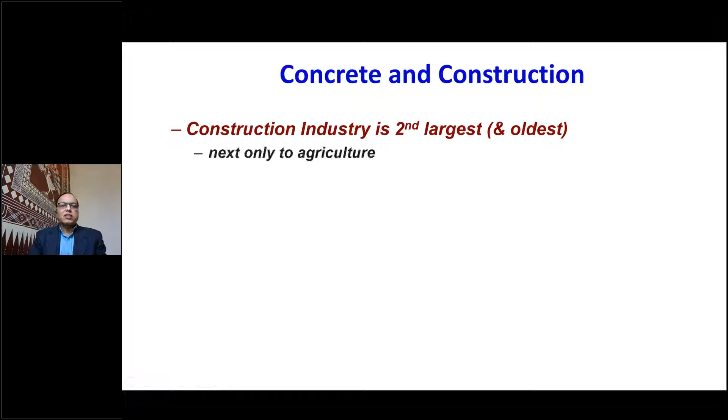Now, straight away going to the topic of today's discussion, special concretes for special structures. We all know what concrete is and how it is useful in day-to-day construction. The construction industry is the second largest, and it is the oldest industry next only to agriculture. Concrete or cement is the second largest material used in our country; number one, as all of you know, is water. Currently, the use of cement is about 250 kgs per head per year. That is the cement consumption. 250 multiplied by the population of our country will give you the total cement consumed in our country.

Currently, India has a potential or capacity of producing about 500 million tons of cement, but we are currently producing about 360 or 370 million tons to cater to the current requirement. Coming to concrete, it is a continuously evolving material. It is not the same old 1:2:4 concrete that we used to talk about. There are many varieties of concrete which have come into being. At least at the last count, I do not know the number now, but when we last listed, it was 65 plus special concretes that were actually being used.

All of you know that concrete is the most used material, and sometimes it is misused, and sometimes it is abused. When it is abused, you see that the structures fail, and that is the time, very unfortunately, when engineers are in the news and TV channels when some structure collapses.

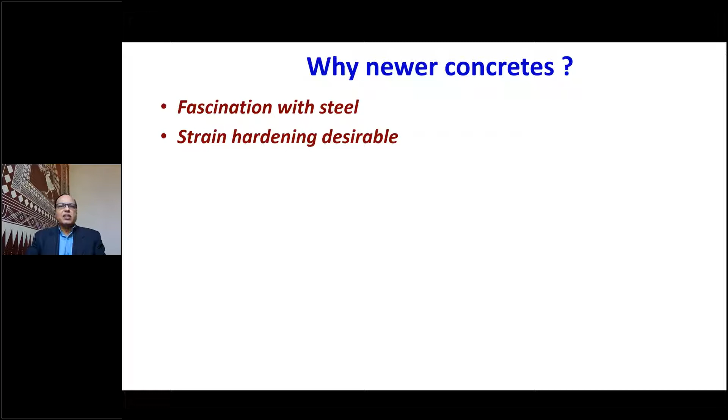Somehow in our minds, earlier days when somebody constructed their house, they felt that their house should be like stone. But now the fascination is more like, my structure should behave like steel. Therefore, concrete also should behave like steel is one fascination that we have. And we also want to take advantage of the strain hardening stage of concrete, not just the linear part of the stress-strain curve.

Today we have a lot of structural requirements and architectural challenges. Many architects want the structure to be very sleek and beautiful to look at. Therefore these are the challenges. Commercial needs, of course, whatever you decide, finally it is the commercial need that guides our construction. And there are several new technologies that are coming. Some of these new technologies I will share with you in the next 45-50 minutes.

Newer materials for rehabilitation are coming up. And there are a lot of ecological concerns. People say that any construction or any industry has to be a sustainable industry. Therefore, sustainable development is definitely a need. Whether we use marginal materials or other cementitious materials like fly ash or slag and so on, which makes the construction sustainable, that also guides the development of new concretes.

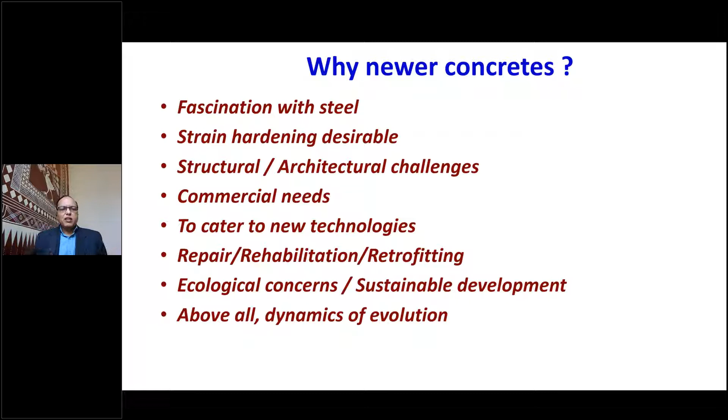And above all, it is the dynamics of evolution. Nothing in the world can stand still. Things keep on changing, and therefore concrete also is no exception. It keeps on changing year after year.

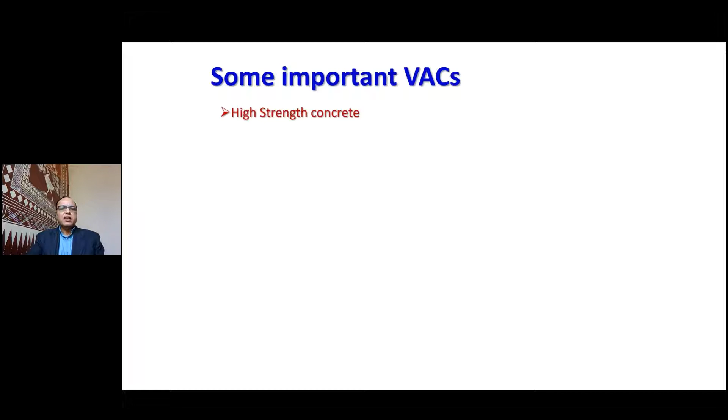Now, some important value-added concretes - VAC, you can understand that it is a special concrete or value-added concrete. There are several things. I am not going to list 65 varieties of concrete, only some important things I'll list out. It may be high strength concrete, high performance concrete, fiber reinforced concrete, ultra high performance concrete, foam concrete. This is one thing that I will talk about in the coming time.

Self-compacting concrete, self-curing concrete, smart or self-cleansing concrete is something which is coming nowadays. Self-healing, that means if something happens inside, some cracks or something, concrete will heal by itself. There is no need to apply any external healing. Self-cleaning concrete, pervious concrete, roller compacted concrete, reflective concrete, translucent concrete, etc.

But now, let us look into some special concretes. In recent days this has made a lot of impact. What are these special concretes which are used for some special structures? One example I would like to give: when we say a concrete of strength M40, M40 can be used for buildings, it can be used for bridges, it can be used for roads, or for several other things. But then it is not the same M40 concrete that goes into all these structures. For different structures, it can be in different ways.

There are definitely certain modifications that are done to the performance of concrete. Therefore, it is not just the strength of concrete which is important, it is the performance of this concrete, how it performs for that particular structure - that is much more important. Let us see, I have listed out different varieties of concretes for different types of constructions. As we go ahead, let us see. Let me start with concrete that is used for certain precast construction. Now I am taking an example of a mass housing project where precast construction was adopted.

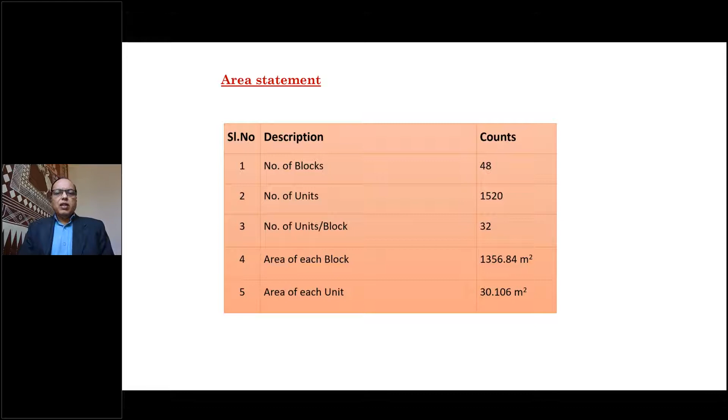Now let us see how it was done. The entire house was constructed in a factory, similar to an automobile industry where a bare chassis comes from one end, the engine is fitted, the steering is fitted, electrical and mechanical components are fitted, and when it goes out of the assembly line, the entire vehicle is ready. This follows the same pattern.

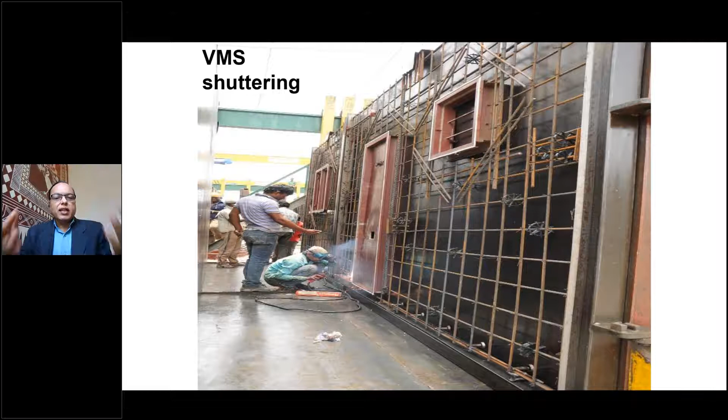The entire house is constructed not at the site, but at the factory. This is the plant and assembly line. You can see it has a single layer of reinforcement for walls. All the doors, windows, everything is precast at the plant, then concreted, and then taken to the structure.

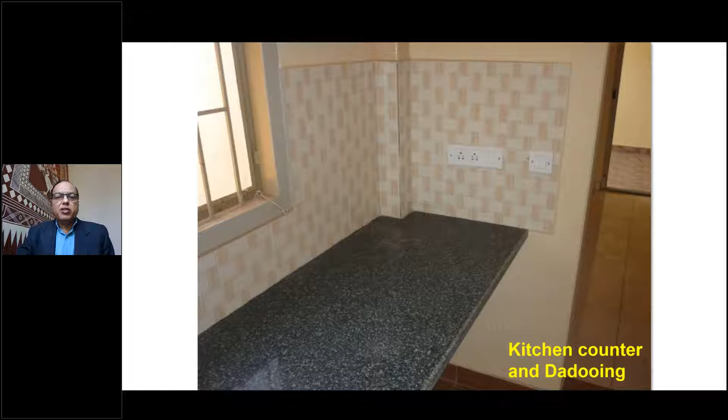You can see this kitchen is ready along with electrical fittings, tiles, and the cooking platform. Everything is ready, but not at the site - all this is made ready in the factory itself. Even the bathroom with all fittings is finished. It is almost a plug and play kind of thing - you can enter the house, but then this house is not at your site, it is at the plant.

Once this is ready, while construction of the house is going on in the factory, at the site the foundation excavation and construction is going on. Even for this foundation, we can use precast concrete blocks - the factory sends them, they are attached to each other, excavation is done, and the foundation is completed. So construction of the foundation is going on at the site while construction of the superstructure is going on in the factory, making the entire project quite fast.

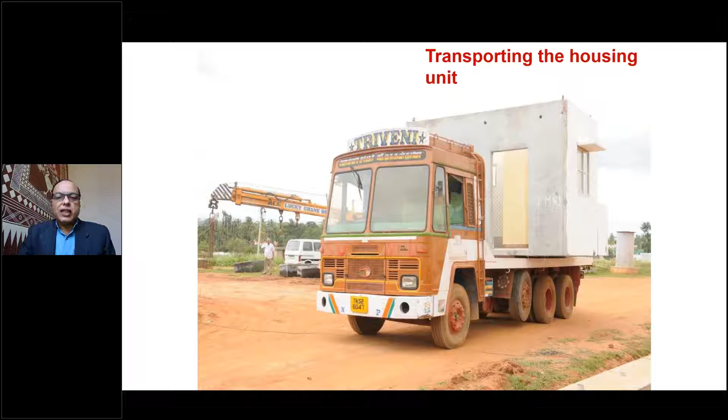After this, the entire house, piece by piece, is transported from the precast factory to the site. This is brought to the site, and you can see it being lifted and put into its particular place, and the joints are all finished, and the entire house is constructed like this.

Please note, this is a mass housing project, and the plan of all the houses remains the same, so it is a modular construction. Now what is the concrete requirement here?

The concrete requirement for any precast project is that it should attain early strength - within, let us say, 3 days, it achieves enough strength for handling the structure, taking it to the site, lifting it, and lowering it to the place where it is to be constructed. That is the advantage with this.

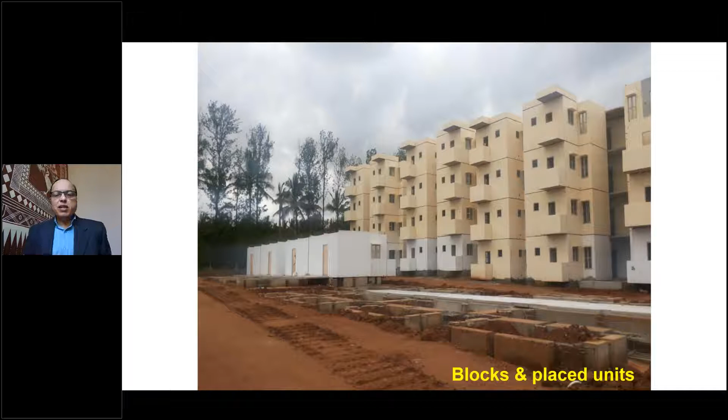One more special requirement is the joints you make, one above the other. When you fix them, making the joints is very important, and even in this case there were a few trials carried out before a proper jointing material was arrived at.

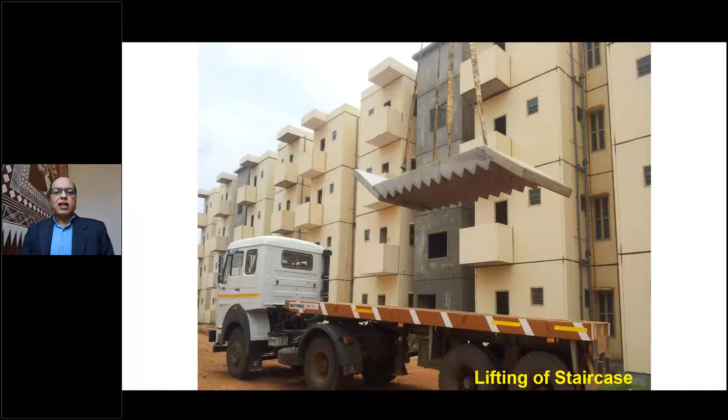Even a staircase can similarly be made in the factory and brought to the site. This is the case of a simple dogleg stair made in pieces and joined at the site to make a beautiful staircase. Once you bring that precast unit, making it at site would hardly take about 2 to 3 hours of time.

Now, this is the project that was supposed to take hardly 1 month's time, but then it took longer, because this was the first experiment even the contractors did, and the government did. Therefore, it took some more time, but still in about 3 months of time, it was possible to get this building. That is the achievement of this.

Now, let us go to the next topic: concrete for mass housing projects, cast in situ. Now, the earlier case was for precast housing projects. This is an example for the house that is cast at site, or cast in situ.

Before we actually go to the case study, let us go through the material, that is concrete, that is used for this. In this project, this is called RMD construction, or monolithic construction. The Building Materials and Technology Promotion Council, BMTPC of New Delhi, has recognized this as one of the approved constructions for mass housing, simply because the technology is quite robust, the construction quality is good, and it is quite fast. How fast, we will see.

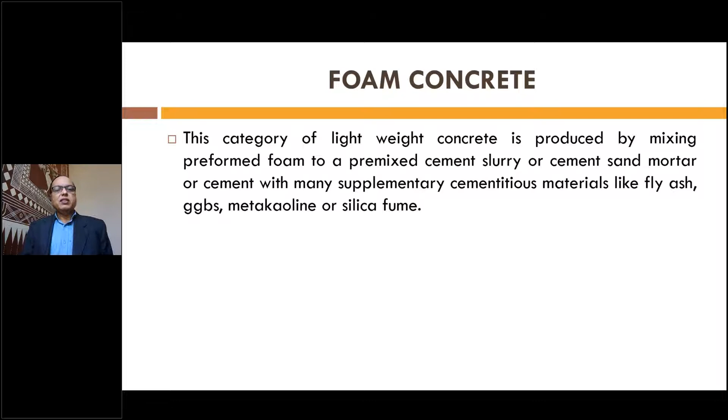Now, this is a very lightweight concrete. Basically, it is a lightweight concrete, and it has the same materials that are used for concrete, that is cement, sand, aggregates, and water. Plus, we have a foaming material. Therefore, it constitutes two things: one is the constituents of the base mix of concrete, second is the foam. Now, what does the base mix consist of?

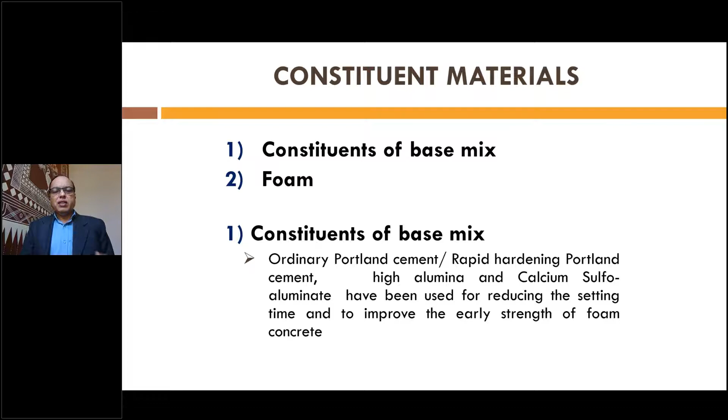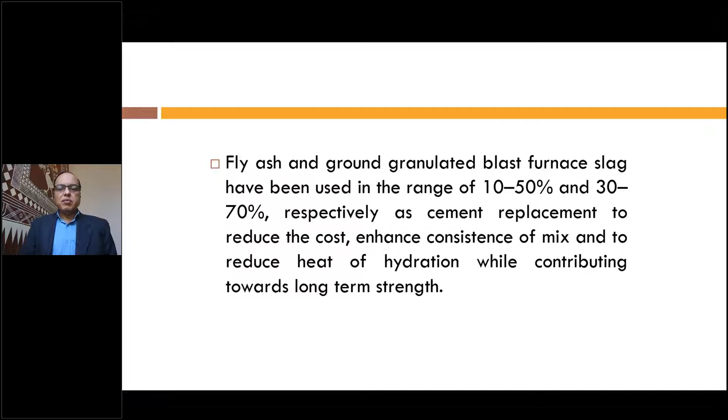It is very similar to the concrete that we make otherwise, either OPC, PPC, or rapid hardening cement can be used for making this concrete. Blended cements are always better. You can use fly ash, the range can be from 10 to 50%. If you make it 50%, it is called high volume fly ash concrete. And slag, you can make it 30 to 70%; you can go for a higher replacement of slag, up to 70%. The advantage is that the heat of hydration of that particular cement is much less because of supplementary cementitious materials, and the strength is not compromised at all.

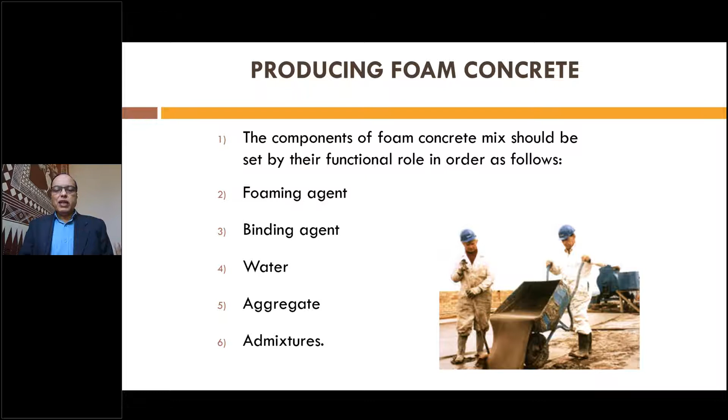Making the foam is not a very difficult thing to do. You have the foaming agent and water that gets into the foam generator, and through an air compressor, the whole thing is mixed and a pre-foaming solution is formed. That pre-foaming solution, foam comes out, and that is mixed with concrete to make it foam concrete.

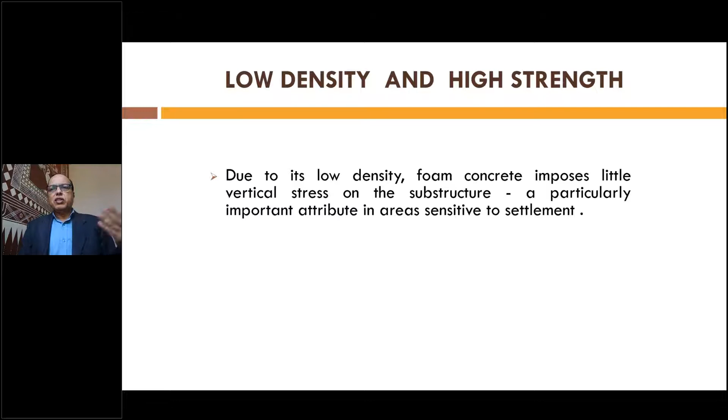Now, the advantage of this foam concrete is that the density would be quite low and the strength would be fairly good. I don't say we can make M60 or M80 concrete with foam, but for most of our structures, it is not just strength that matters, it is the ease with which you can use that concrete. It has a very low density compared to the normal concrete density of 2,500 kg per meter cube. This can have a density of say 1,600, 1,200, or even 800, or it can go as low as 600. But if you use 600 or 700, the strength is likely to be less, maybe about 5 MPa or 8 MPa. Therefore, if you need more strength, slightly increase the density, and your strength also would increase.

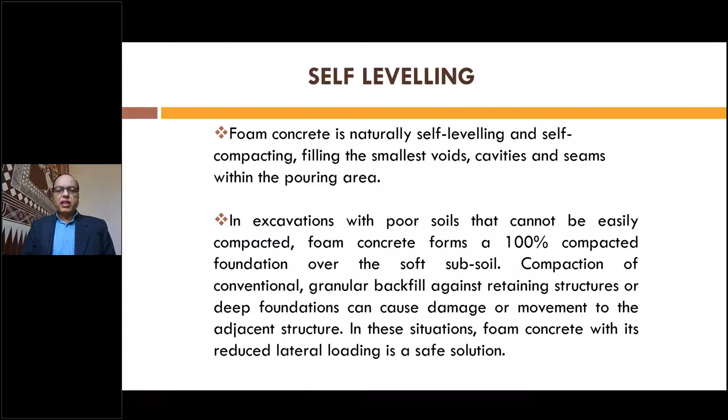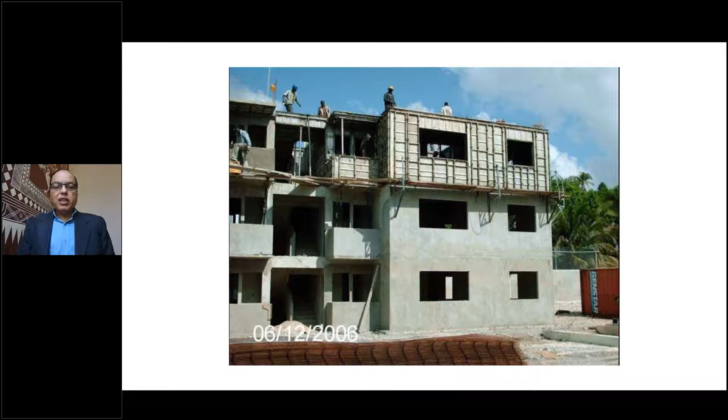Using this, here is the story of a building in Gujarat built a few years back. This ground plus 3 building was constructed at the rate of 4 days per floor. Therefore, 4 floors including the ground floor, 4 into 4 is 16. Simple mathematics. The whole thing was built in just 16 days.

What is excluded is the foundation work. Let me put that in proper perspective. Once the foundation was done, each floor took only 4 days because of aluminum shuttering and foam concrete. The reason the time compresses so much is mainly because the finishing is so good.

You can see the external as well as internal finishing of the concrete. Both are so smooth and so good. There is no need for plastering, and the thickness of these walls can be 100 to 125 millimeters. The finishing is excellent, so you don't require additional time for plastering.

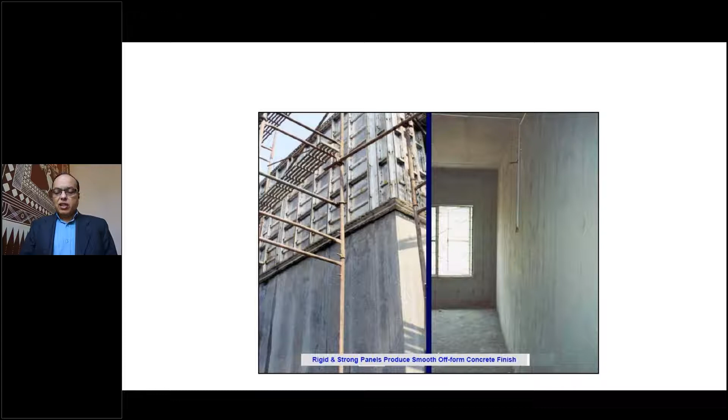You can see this entire aluminum shuttering doesn't need many people working on it. Very few people can erect it because it is light in weight. The initial cost of procuring aluminum shuttering may be high, but it can be used many times. For example, this aluminum shuttering for a house can be used a minimum of 100 to 150 times. So you can always recover the cost within these 100 or 150 repetitions.

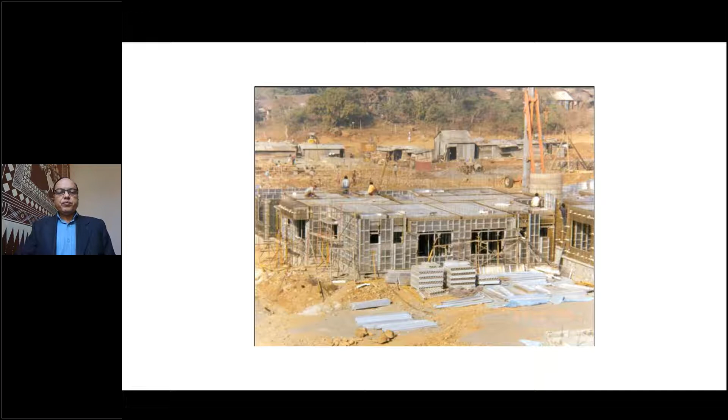Now, this technology, we were first introduced to in the year 2012. We were aware of this aluminum shuttering and some structures that were built with it. So we ourselves used this technology, and that was in the year 2012.

That was in a small village near Hubli called Shigaon. In the village Shigaon, the then government of Karnataka wanted to construct several hundreds of houses of the same plan, around 300-350 square feet each. They wanted to construct it very fast so that the beneficiaries could occupy the houses early.

When there was a meeting to discuss various methods to construct the houses fast, this was one of the technologies discussed. It was said that the then chief minister would visit the village within the next 8 days, and we had 8 days to work on this. So the very next day, we shifted the aluminum shuttering required for construction of one single house from Bangalore to Shigaon.

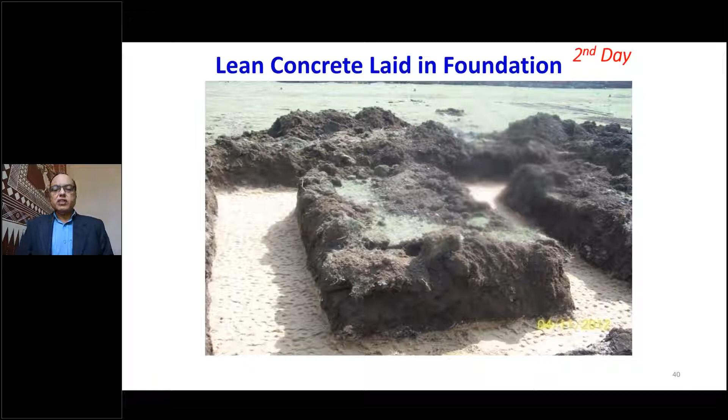The day starts, this was done in 2012. Day one, we had excavation for foundation. Day two, lean concrete was laid as foundation. Day three, the foundation was completed up to the plinth. Day four, wall shuttering with single layer reinforcement for the walls, and the normal reinforcement for the roof.

Wherever there was a door, window or ventilator, that was taken care of, and those openings were left while placing the aluminum shuttering, all as per the design. The wall consists of single layer reinforcement.

Actually, the wall would need concrete of relatively lower strength, maybe M10 or M15, but the roof would require M20 concrete minimum. But in this case, because we were short of time and it was a village maybe 40-60 kilometers from Hubli, we brought only one variety of concrete, M20, for both the walls and the roof.

On the fourth day morning, this entire thing was completed in about half a day's time with just 3-4 laborers. The same evening, we were able to pump concrete to the roof as well as to the walls. This concrete was designed for one day strength.

Friends, please note, designing of concrete, that is concrete mix design, is a very interesting subject. Whether you want the strength to be designed for 28 days strength, or you want that strength in 1 day, 3 days or 7 days, you should design it accordingly.

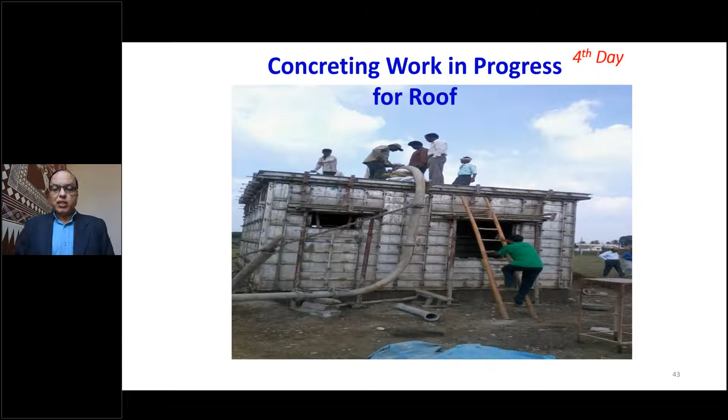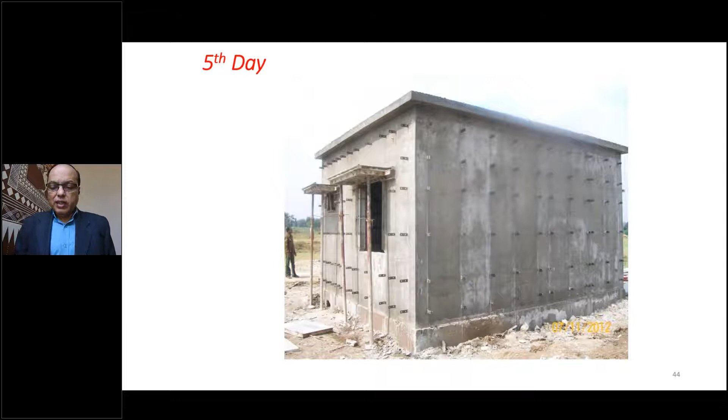In this case, we had designed it for 1 day strength so that we could de-shutter. Fourth day concrete was put, and on the fifth day, after 24 hours, we removed all the side shuttering. Only the vertical props were kept for 1 more day. After that, on the 6th day they were also removed, and 1 coat of painting was done on the 6th day.

The house was ready on the 7th day morning for opening. We fixed the doors and windows also, and when the then chief minister came to lay the foundation stone, this entire project was carried out by the Rajiv Gandhi Rural Housing Corporation of Government of Karnataka, and you see the officials of Rajiv Gandhi Corporation also there.

And when the chief minister came there, he said, 'What is this? I came to lay the foundation stone for the housing project, but one house is already built and ready.' And we requested him to inaugurate that house, and he inaugurated it.

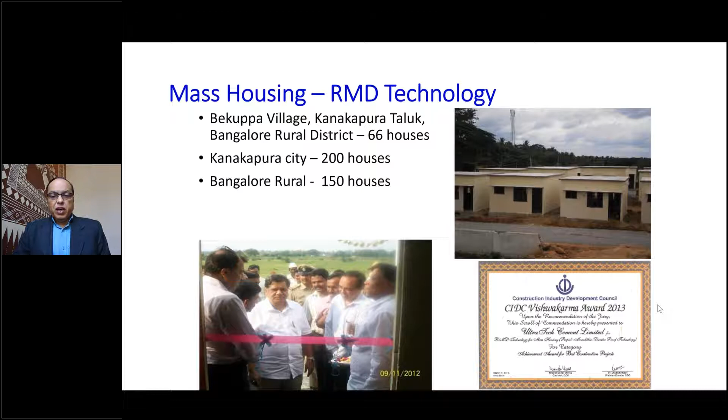Later on, using that, a lot of houses came up in that place, as well as in several other places in Karnataka. Several thousands of houses have been built. And for promoting this fast construction technology, Ultratech Cements also got a CIDC Vishwakarma Award in the year 2013.

This technology is not useful only for low cost housing, poor man's construction. It is now being used very extensively in multi-storied buildings also.

Using the same technology and the same material, concrete, that is foam concrete, there is another project that came up in the outskirts of Bangalore, Value and Budget Housing Corporation project, VBHC in Bangalore near Attibele. It consisted of 38 blocks, ground plus 7, with 1 BHK, 2 BHK and 3 BHK houses. A total of 1,886 apartments were built using the same aluminum shuttering and foam concrete.

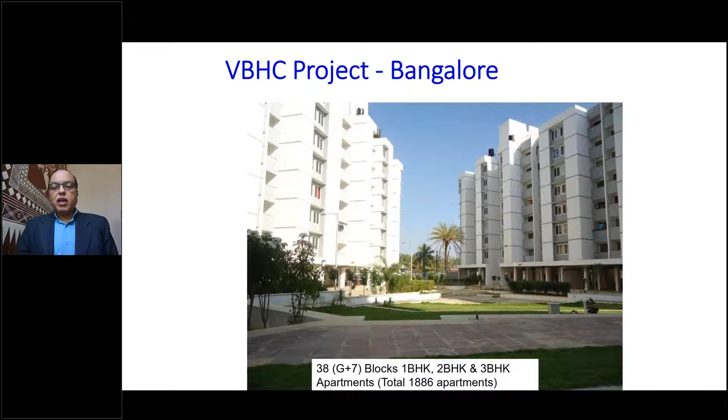What was the additional thing done here? Look at the concrete that was used. The cementitious content was 320 kg per meter cube. Water binder ratio was 0.5, and a PCE based admixture super plasticizer was used.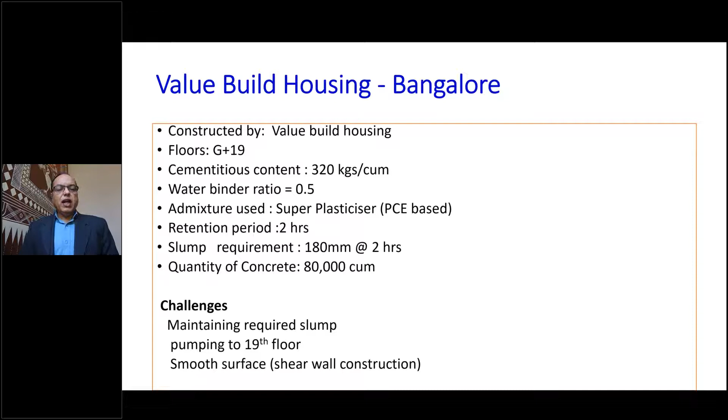The retention period, that is the slump retention period, was 2 hours, with a slump requirement of 180 millimeters till 2 hours. The quantity of concrete required for the project was 80,000 cubic meters, and that much quantity should have consistent strength as well as consistent slump. The challenge was to maintain the required slump while pumping it to such a great height, and it was a shear wall construction.

Instrumentation was used in the concrete, using what is known as the wireless maturity meter system. Sensors were dropped in concrete at several locations. When pouring concrete to the walls and to the roof, sensors were dumped at different points in the building, and their job was to assess the in situ strength of concrete.

Whatever property the sensors catch, the maturity of concrete, is related to the strength of concrete, and without testing cubes, you can sit in the lab and come to know the strength of concrete. Each of these sensors is numbered and identified, and their location is identified, like a smartphone with location facility where you can identify where it is put. With this, you can find out the strength of concrete, and that was the additional thing done in this particular building.

In this building, VBHC, there was foam concrete, aluminum shuttering, and instrumentation. All that put together made it a very high quality concrete.

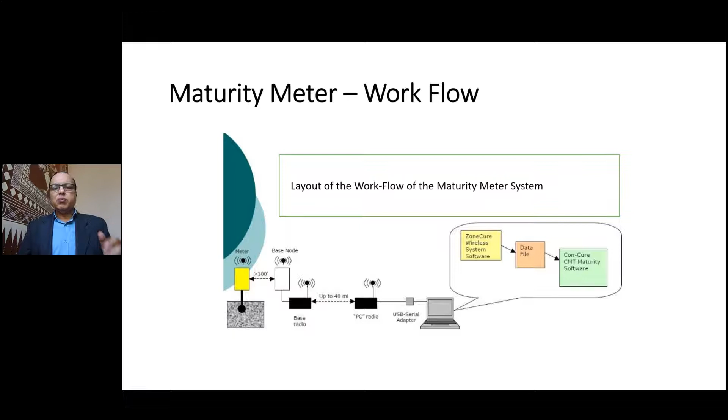Before I complete housing, let me share one more small experiment: light gauge steel and foam concrete construction.

Instead of in situ or precast concrete, here we use a light gauge steel frame that can be assembled easily anywhere to make the structure. On either side of the wall, composite boards are placed and foam concrete is poured in. Once poured, the composite boards stay in place as part of the construction, not removed like shuttering.

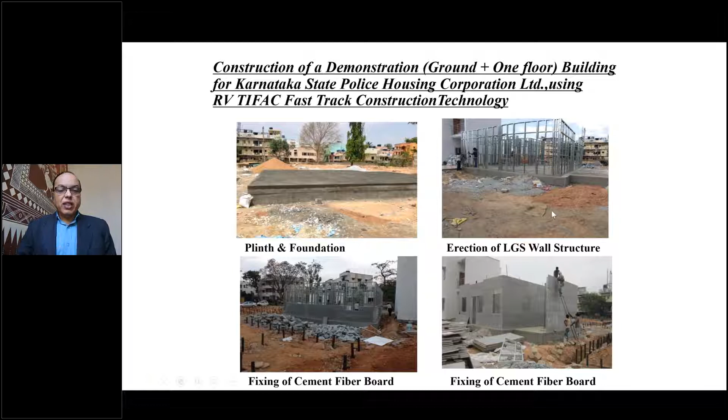These are the different stages of construction. Plinth and foundation are done almost the same way. Next is erection of the light gauge steel wall structure, then erection of the board and fixing of the cement fiber board. All electrical and sanitary fittings also get fixed into this board or shuttering, which is very easy to operate.

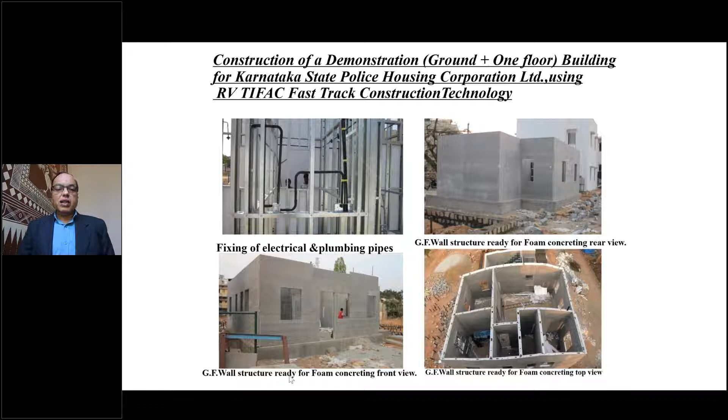Once you complete the entire thing, you pour concrete. You can see on the right hand side bottom, all the wall panels are poured with foam concrete, and then finally you have the house. This house was constructed for the Karnataka State Police Housing Corporation.

I must mention the Society for Development of Composites. RV College of Engineering has an association with this, and there is a very learned man, Dr. Gopalan, who has great expertise in developing this light gauge steel formwork and frame, and with that this house was constructed.

Please note, constructing anything with new technology, especially for police housing, involves some small risk. Police personnel are going to stay here, and if it doesn't work well, you are definitely facing a risk. Therefore, even after constructing this, we used to go to the place to check for any cracks, moisture, or other distress.

In all these projects where new technologies are adopted, even after construction is over and it is occupied, it is essential to stay involved with the people living there and learn from any probable mistakes, so that your next experiment would be better.

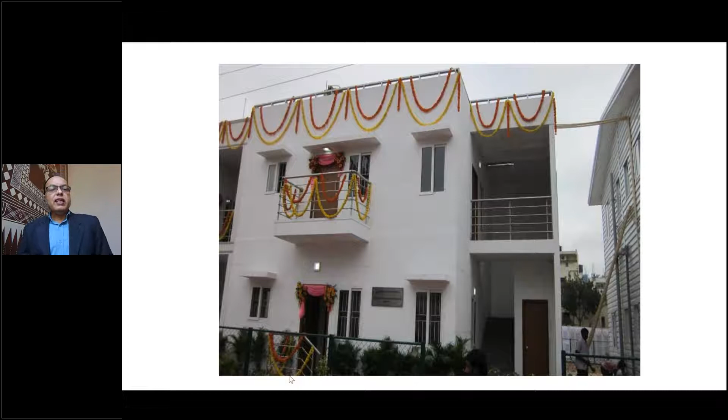The next variety of concrete is lightweight concrete. Like foam concrete, lightweight concrete also reduces weight, but it is produced differently, not the way foam concrete is produced. Its weight is reduced by using either foam or polystyrene beads. Using polystyrene beads also reduces the requirement of coarse aggregates, thereby reducing the density of concrete.

You can bring down the density of concrete to about 500 kg per cubic meter, but the strength would then be in the range of 4 to 5 MPa. There are a lot of benefits of this, let us see what they are.

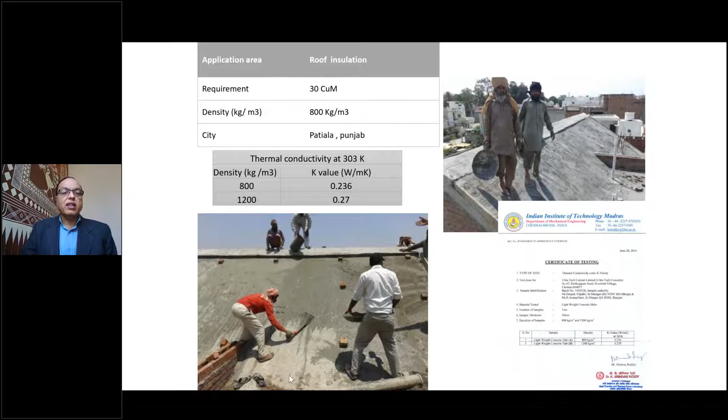You can use it as a floor screed and for sunken slabs. The great advantage is that the thermal conductivity is excellent. The K value is also given, and the density is hardly 800 to 1200.

This has been tested at IIT Madras for its properties, and these are all the applications. It can be used in sunken slabs—in this case the density was 800 kg per cubic meter—and in the second photograph, you can see it applied even for rooftop application.

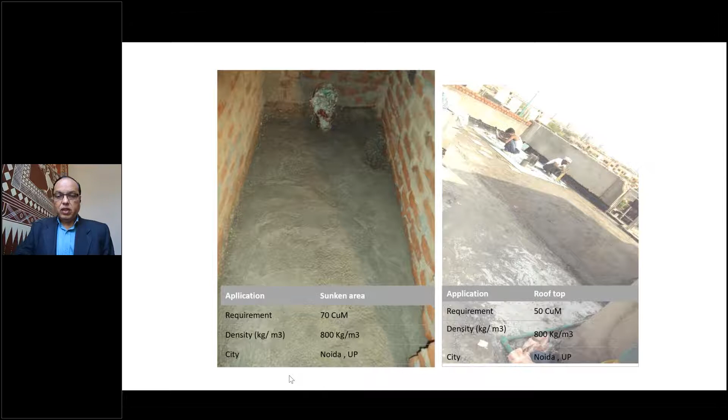The next variety of concrete we'll discuss is temperature controlled concrete. Why should we contain or control the temperature? It is from the point of view of thermal cracks.

Whenever concrete is used for mass concrete projects, the heat of hydration would be so high that huge cracks develop in the concrete. Therefore, in such projects, whatever strength of concrete you make, whether M20, M30, or M50, you should also ensure that the temperature of the concrete is quite low.

The benefits of this are no rapid loss of slump and drying of concrete, no early setting or stiffening, reduced plastic shrinkage cracking, and it is very easy to finish. The 28 day strength is no issue at all.

This is one example, the Bilimoria project, where this was used. About 8,000 cubic meters of concrete was used over about 3 months for M35 concrete. This Bilimoria Towers is in Noida, UP, and it was used in the raft foundation.

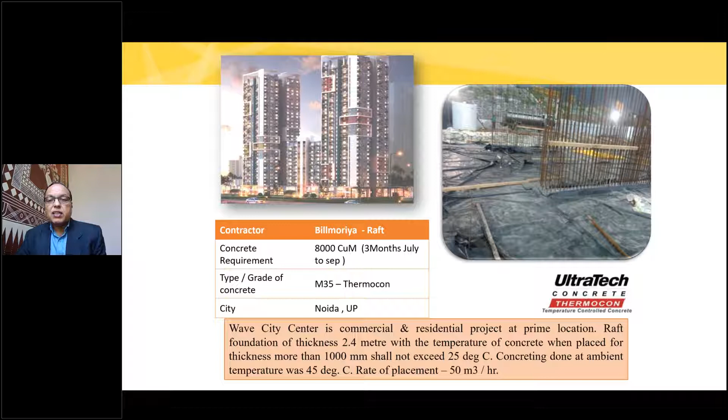Because the thickness of the raft foundation was 2.4 meters, you can imagine 2.4 meters thick concrete foundation. Therefore, the temperature of concrete, when you place it for a thickness more than 1 meter, should not exceed 25 degrees centigrade. That was the condition, and the concreting was done at an ambient temperature, with rate of placement per hour about 50 meter cube. In this project, about 8000 cubic meters was used.

Now let us come to another mass concrete project, the Dhirubhai Ambani International Convention and Exhibition Center in Mumbai. It was a Reliance Industry owned project, and the construction was done by L&T Construction. The grades of concrete varied between M40 to M70.

Now look at the condition here. It is not just the strength that matters, M40 or M70. The fresh concrete property was that the concrete flow should not be less than 500 millimeters. Please note, this is a self-compacting concrete. The slump is not measured vertically, it is not the vertical slump cone measurement, but the horizontal spread of concrete. It is something like you pour dosa batter and see how it spreads. Concrete also should spread like that, and there should be no segregation and no bleeding. Therefore, you must make a cohesive concrete.

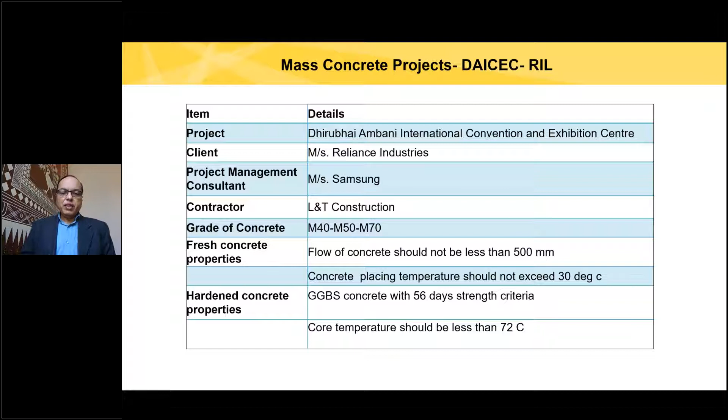Now, in this case, for GGBS concrete, 56 days strength was the criteria, and the core temperature should be less than 72 degrees. This is the Dhirubhai Ambani International project, and it was designed using 66% supplementary cementitious materials, that is GGBS. Why 66% of slag was used? It was mainly to control the thermal stresses coming, particularly in mass concrete foundation. Please note, 66% supplementary cementitious material is used, therefore the cement content was only the remaining 34%.

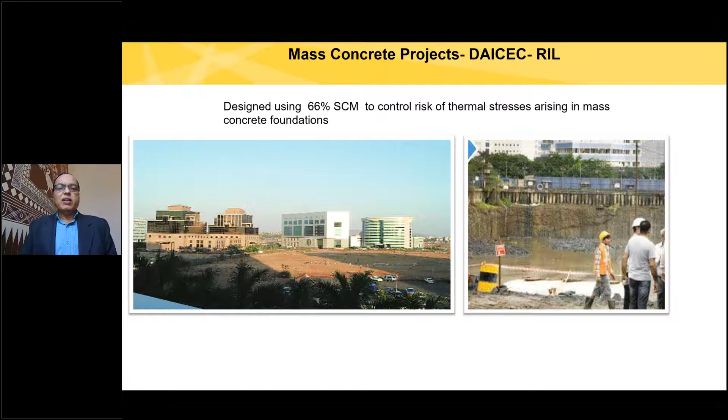Did we compromise on strength? No way. The strength requirement was M40 to M70. Was there a compromise on the slump? No way, slump was 500 millimeters flowing slump. Therefore, this was a requirement, and that is how it was satisfied.

Now let us move to another variety of concrete called high strength concretes. What may be the strength range? We are talking of some examples where high strength concretes are used. The example I would like to take is the Mumbai monorail project. Right now, Mumbai has only one monorail project that travels from Chembur to Wadala, and it was again L&T's job. They were the contractors of this project. Now, their requirement was two varieties of concrete: one was M45, another M60.

And again, look at the flow of concrete. The flow of concrete in this project should not be less than 550 millimeters, so much flow it should have. And then the placing temperature should not be greater than 32 degrees. Now, look at the concrete properties.

Maybe it is M45 or M60, but even M60 should have 48 MPa in 3 days - it should gain that strength within 3 days. That means high early strength concrete is required, and the RCPT, rapid chloride permeability test, which is a measure of durability, should yield not more than 800 coulombs at 56 days, not 28 days.

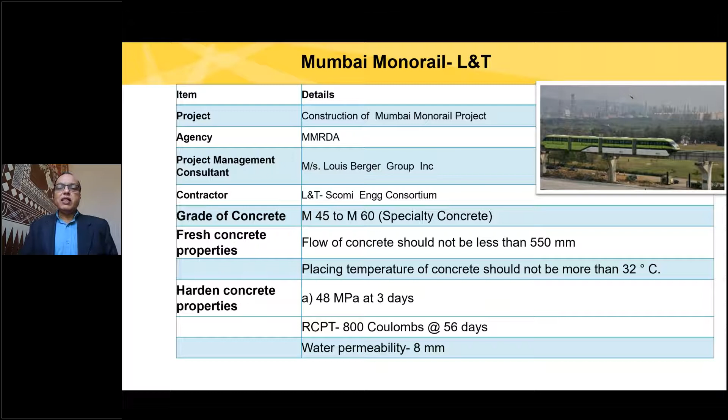Both chloride permeability and water permeability are measured, and there is a limit for each. This was a very challenging project executed in Mumbai. You can see here a pier, and the junction of the pier with the beams. On the left side, for the pier concrete, M45 self-compacting concrete was used. On the right side, at the junction of the pier and beams, M60 concrete was used - this is called stitch concrete. This stitch concrete should also be flowable, self-compacting concrete, with the same properties we saw earlier.

Now this is the finished structure, the Mumbai Monorail structure. What were the concrete properties here? Please note the cementitious content was 565 - not just cement, but cement plus mineral admixture content, 565 kgs. And what is the water binder ratio? When you use other cementitious materials, you call it water binder ratio, not water cement ratio. The water binder ratio was very low - 0.24.

Therefore, to achieve this very low water binder ratio, we have to use high range water reducers. But still, the slump retention period required was 5 hours - that was the slump requirement. And what is the quantity of concrete?

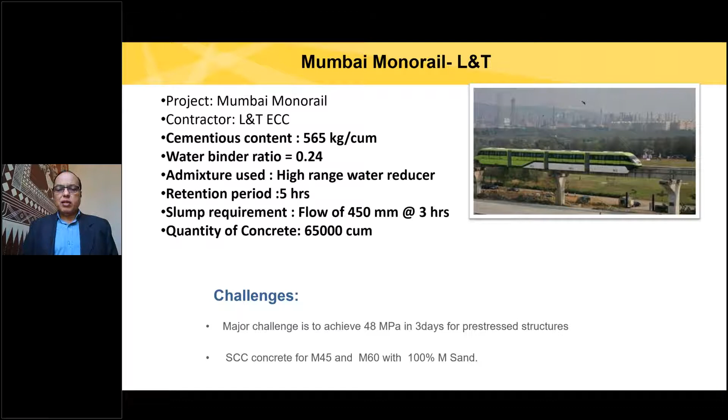Now the next category of concrete we look for is concrete for high-rise pumping. Today high-rise structures are coming up all over the world, including India. But we have not gone up to the stage of, say, Burj Khalifa, where out of 800 meters, concrete was pumped up to 550 meters. In India, the maximum height reached is about 250 meters. Let us see how this high-rise pumping of concrete was handled.

This project is called the One Avighna project, again in Mumbai, and the grade of concrete varied from M10 to M60. Look at the conditions for fresh and hardened concrete: the flow should be 500 millimeters, and the height of pumping should be 250 meters high. Remember, 250 meters is a quarter of a kilometer - pumping water to 250 meters itself is challenging, so pumping concrete to that height is a real challenge. Also, fly ash should not be more than 25% - that was the requirement.

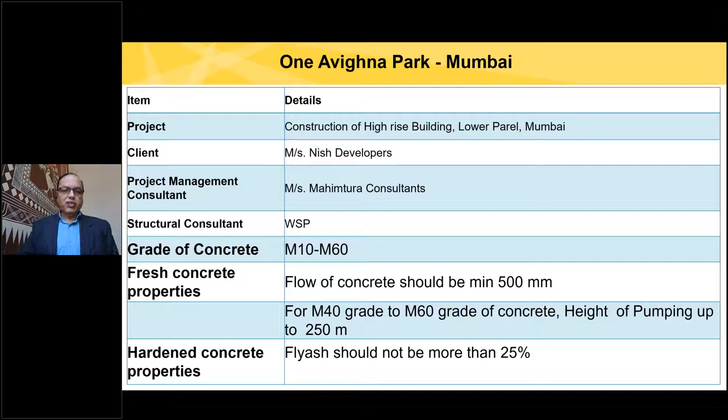Now this is the One Avighna Park project, built by Simplex, the contractors. Cementitious material was again 595 kgs, water binder ratio was 0.25, with high range water reducer used, and flow was 550. The concrete quantity was 1 lakh cubic meters.

So much cubic meters of concrete had to be made with the same consistent property - from batch to batch, you cannot vary. That was the challenge. Our biggest challenge in that project was flowability and pumping of M60 concrete beyond 100 meters. Up to 100 meters it was manageable, but beyond that it was a real challenge - again with 100% M-sand.

Now let us look at some more examples of free flow concrete and self-compacting concrete. This is the case study of the Mantri Pinnacle project, where M70 high performance concrete was used - Hypercon means high performance concrete. You can see the construction and the boom pumps being used at different levels.

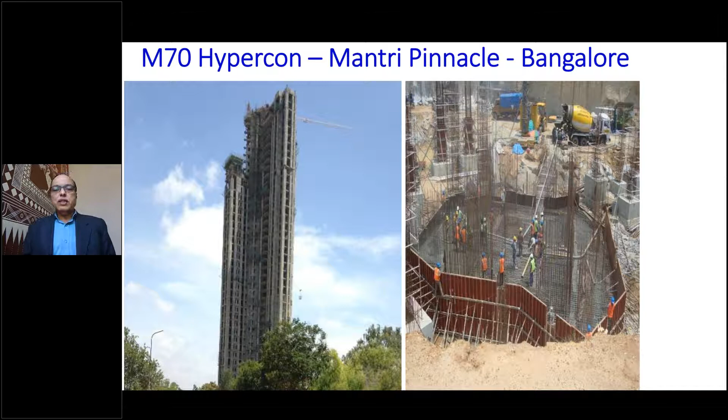What was the concrete requirement here? The structure had 45 floors, ground plus 45, and the cementitious content was 450 kg per cubic meter. The water binder ratio was 0.28, with high range water reducers used. The slump requirement was 150 millimeters, and this slump had to be maintained at 3 hours, not at 1 hour or 10 minutes - even after 3 hours of mixing, the slump should be a minimum of 150 so that you are able to pump it.

Now let us look at the other variety of concrete - concrete used for pavements, concrete roads. You're all aware that in recent times, even in Bangalore, Chennai, Hyderabad, Mumbai, Pune, everywhere, a lot of concrete road projects are coming up, white topping projects are coming up. Therefore, what we use there is called pavement quality concrete.

The pavement quality concrete and normal concrete differ in that, for example M40 pavement quality concrete, is measured with respect to its flexural strength. Flexural strength is important in case of PQC. The second requirement is that, being a structure on the ground, it is likely to crack more. Therefore, as a crack arrestor, we also use fibers - these may be polypropylene, polyester, glass, or even steel fibers, though steel will increase the cost. That is called pavement quality concrete.

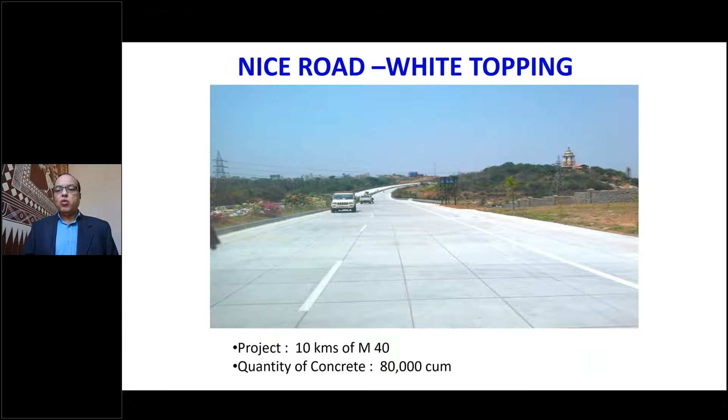About 10 kilometers was done in the first phase with M40 concrete. The quantity of concrete required for this was about 80,000 cubic meters, and this was PQC, pavement quality concrete, which I explained.

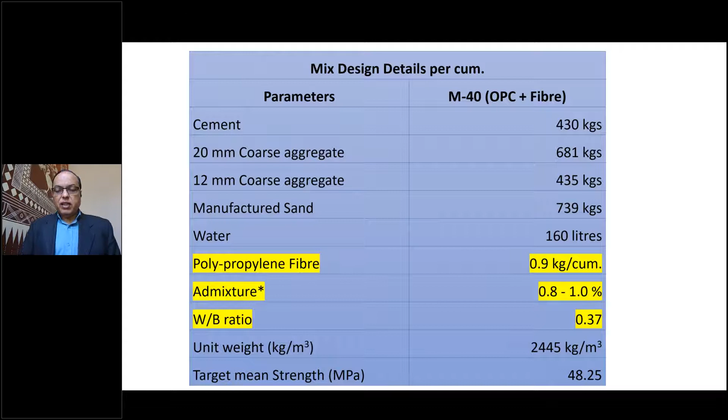Now, this was the mix design for that particular project. I just want you to observe some highlighted portions here. Polypropylene fibers were used at the rate of about 0.9 kg per cubic meter - a small percentage of fibers that helps greatly to reduce cracks. Admixture of 0.8% was normally used, though sometimes we varied it up to 1%, and the water binder ratio was 0.37. The target mean strength was 48, and what was achieved was much more.

Now, if we can make concrete pavements in situ, can we make concrete pavements precast? When we make use of precast concrete for all kinds of bridges, flyovers, etc., can we also make it for pavements? Precast pavements is the new variety of pavements - precast, pre-stressed concrete pavement.

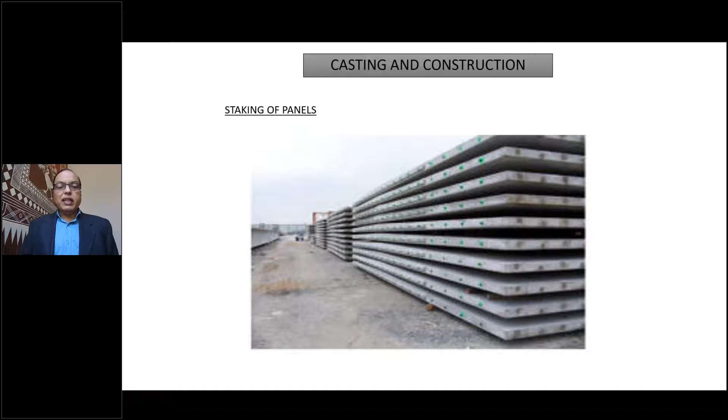The road is operating, but these precast panels are already kept ready. Then the road is closed for traffic. In one case, the road was closed to traffic in the evening, the subbase was finished, the panels were laid, the joints were finished, and the road was open in about 12 hours - the next morning it was open to traffic. Therefore, unlike cast-in-situ pavements, these precast pavements can be constructed very fast. In other countries, they have been making these precast roads.

In the US, they adopt a particular technology. In Singapore, they adopt a different but very similar technology. It was our dream to try this technology, and finally it has been implemented on a small road project which is currently ongoing - about 400 meters is already constructed. This is the Singapore experience, precast concrete pavement.

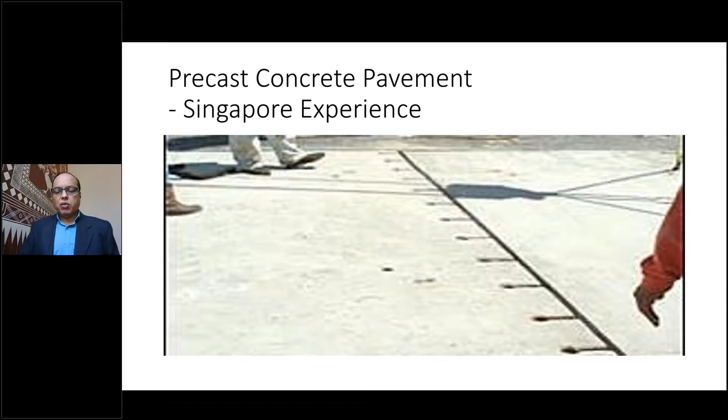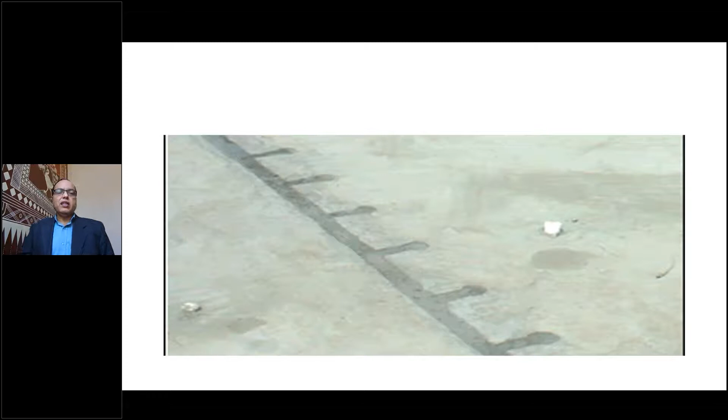The two precast panels are brought close to each other and joined using couplers. You can see these couplers are grouted, and when they are grouted, this forms a neat joint, and there is no problem at all.

Now, this is the precast pavement that we were associated with in Nagpur, with an excellent contractor and the Nagpur Municipal Corporation. We have tried this project. Precast panels were made at the factory. They were just brought and assembled at site, and these are different photographs of that particular thing.

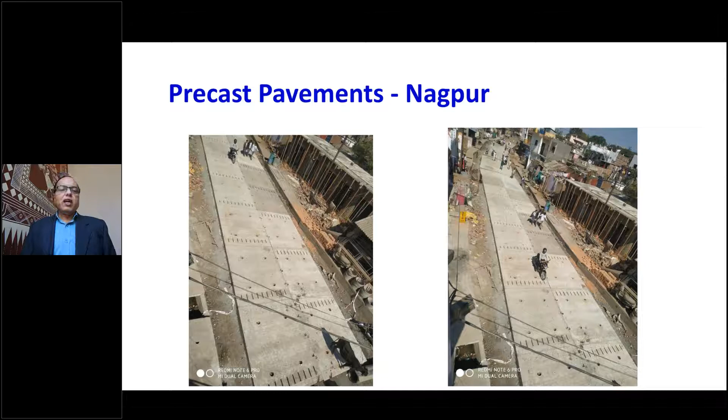Now you can see the finished precast road, but the length right now is close to about 400 meters. It will continue, there is a break, and it will continue again. There are some more projects of such precast concrete roads coming up. Maybe after the lockdown, we may do that in Bangalore also. This is an excellent opportunity, and since precast concrete is used, the quality is also better.

Next, let us go to another variety of concrete. Earlier we talked about high strength concrete. Now let us talk about high early strength concrete. What do we mean by high early strength? Earlier we talked about 3 days, that is also an early strength concrete. Now we talk about much earlier, maybe 1 day - what is the strength? In 12 hours, what is the strength? High early strength concrete is required more for repair works than for construction works.

Now let us look at this. This is designed to achieve very high strength faster, so that faster loading of the columns, beams and walls is possible. It has the advantage of both workability as well as high strength gain, by using special additives and special mix design. Very high durability, early stripping time, and therefore superior finish, and it performs very well.

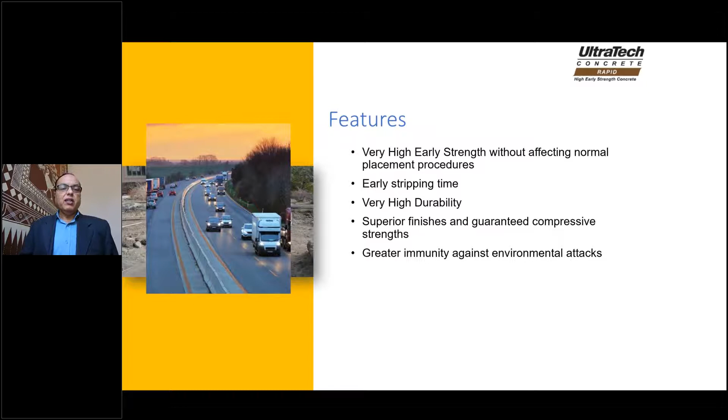Now, 1 or 2 case studies we will see. Repair of the expansion joint at the Belapur bridge. You know, Mumbai, Navi Mumbai, Belapur is a very busy junction, and the bridge had to be repaired, and the quantity of concrete required is small, but the quality requirement was very high. In the sense, you can't close that road for several days. You can't say I am using concrete, therefore wait for 28 days, wait for 7 days. No, that is not possible.

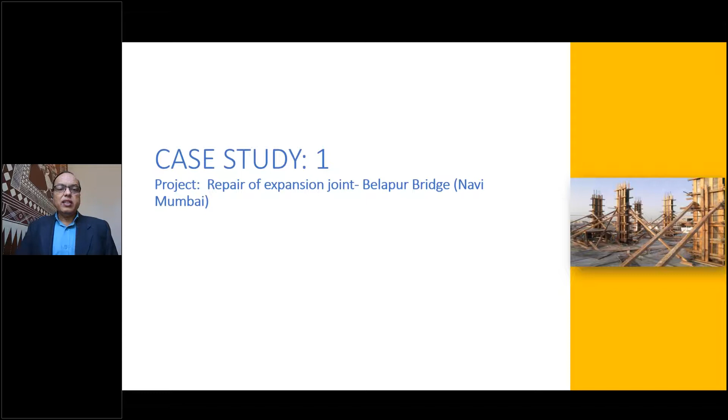Therefore, in this case for the Belapur bridge, the challenge was to achieve 35 MPa of concrete in 24 hours. Not even in 3 days - in one day you have to achieve 35 Newton per millimeter square. Therefore, concrete was supplied in small quantities, skip or the bucket concrete, we call it. It was supplied in such small quantities, and the transit time was about 1.5 hours from the RMC to the site. Concreting has to be done during very heavy traffic movement, and within 24 hours it should be ready for use.

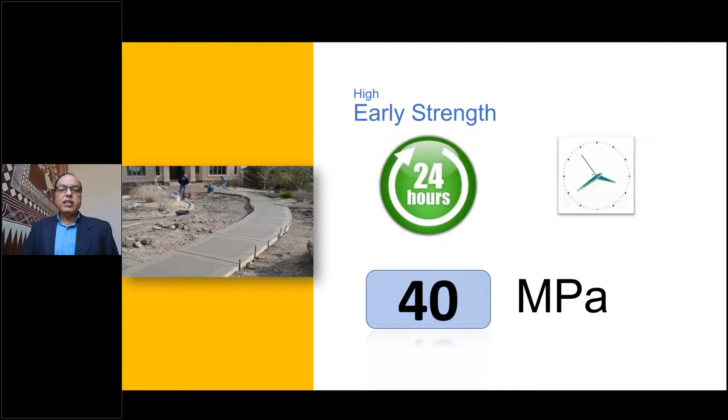The flow, that is the slump, is 550 to 700 millimeters. The fluidity is very high, but it doesn't mean that there will be bleeding and segregation. Segregation resistance and bleeding resistance is also quite high.

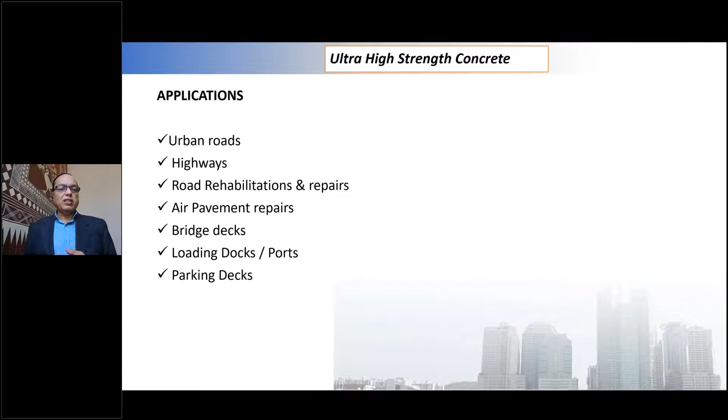Where do we use this ultra high strength concrete? It can be used in urban roads, highways, rehabilitation works, air pavement repairs, bridge decks, and so on. And what are the properties? The initial slump is collapse, 1 hour also is collapse, and after 2 hours it should have a slump of 160 millimeters. And look at the strength requirement - in 24 hours you require 40 MPa, 1 day it should get so much of strength, 7 days 88 MPa, and 14 days 100 MPa was the strength requirement.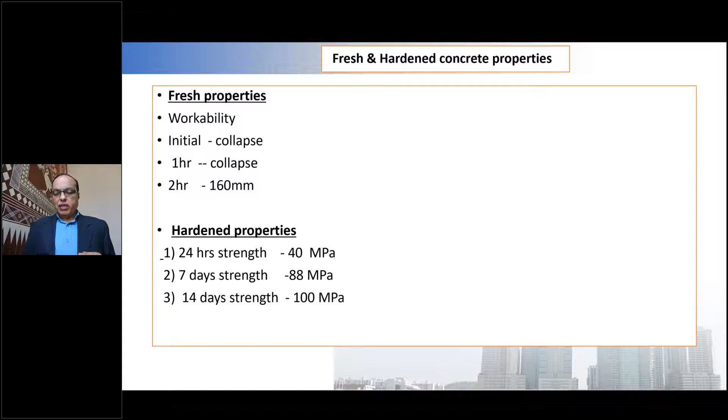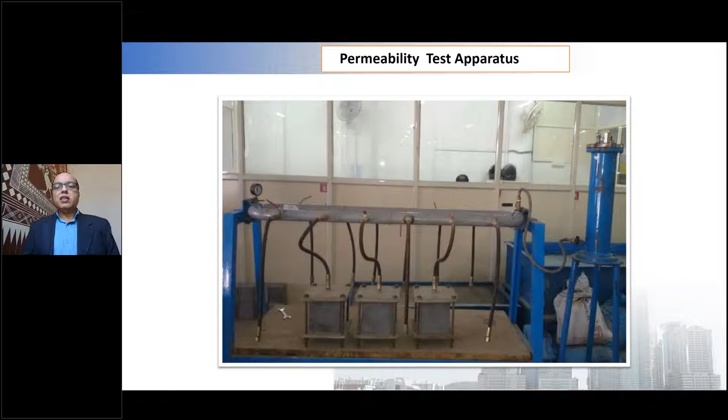Now, friends, from strength and high strength and ultra high strength and early strength concrete, different varieties of concretes that we have seen. Now, let us go to something which looks beautiful. It is called architectural concrete.

Now, architectural concretes - there are several varieties of architectural concrete. The first variety of architectural concrete is colored concrete. Colored concrete is the first variety. Now, it is manufactured using a very consistent quality ultraviolet resistant pigments.

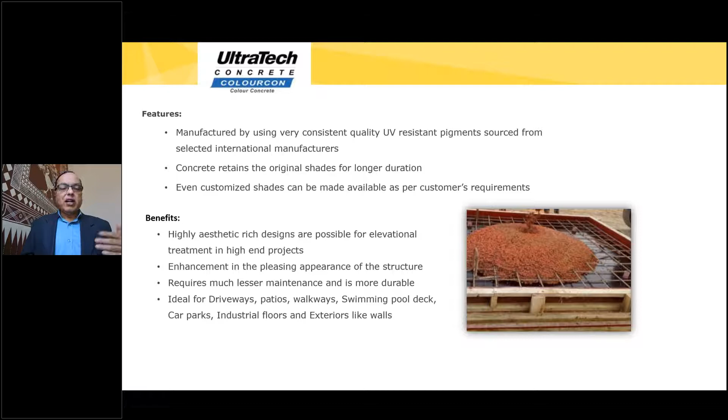We source it from some select manufacturers. It should give ultraviolet resistance and long durability without the color fading. Therefore, it is now possible to make concrete of any color that you want, not just gray. It is useful for swimming pool decks, car parking areas, industrial floors, etc.

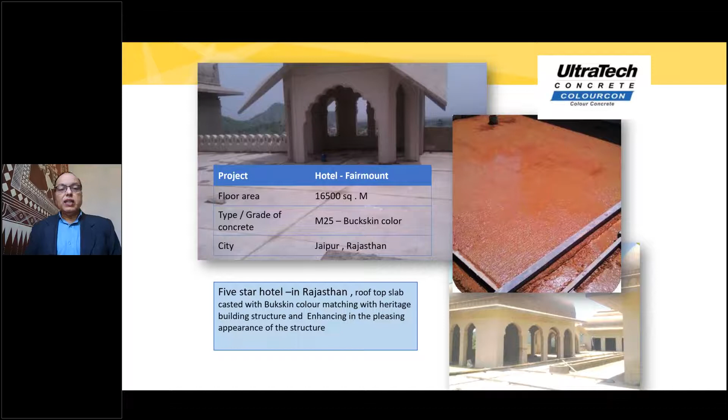Let us look at some examples. This is the Hotel Fairmount project in Rajasthan, where the rooftop slab was cast with this kind of concrete. It is an M25, normal strength concrete, but a huge area - 16,500 square meters - in Jaipur. It's a buckskin color, uniform throughout.

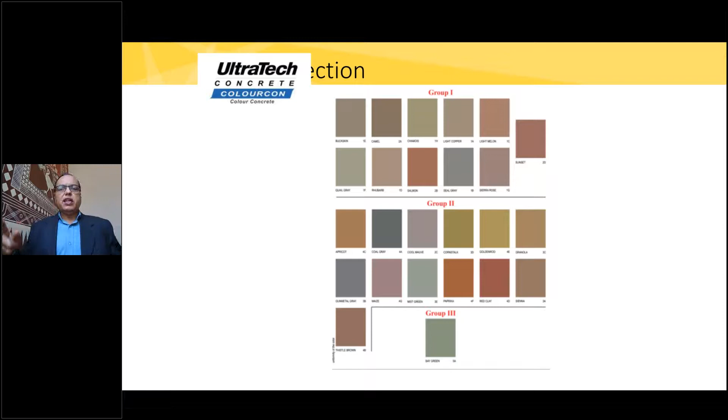In addition to making concrete of different colors, you can also stamp it. Stamped concrete is very good, particularly for parking areas. You have a design that is pressed or stamped onto the fresh concrete. The surface should remain fresh for some time so it doesn't set, so we spray retarders, press the stamps to make that design, then it is cured, and you can see the finished surface.

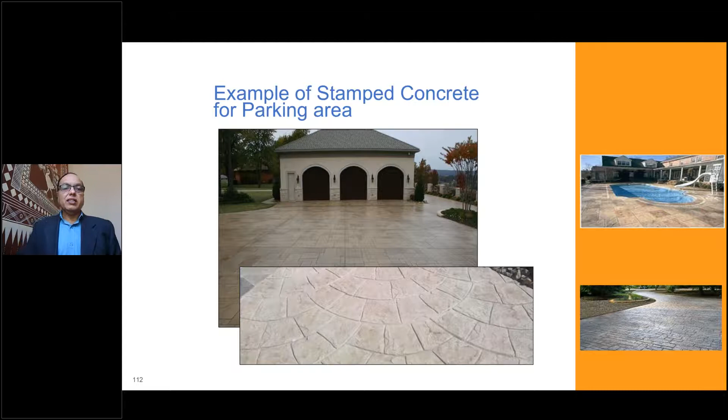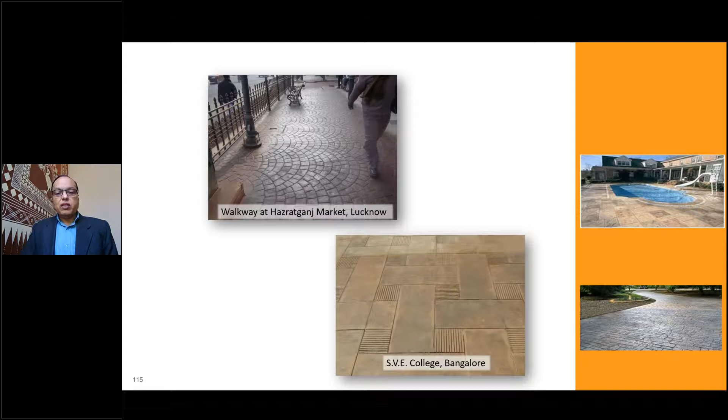This is stamped concrete for a swimming pool, and here is another photograph of a swimming pool. These are more photographs, from Lucknow, Bangalore and so on. This is a driveway with stamped concrete, and here are some more examples.

Now with polished concrete - I'm coming to the end of the presentation, maybe the last one or two slides. You can change the color of concrete, as I said, and bring in a lot of design with stamped concrete. You can also polish concrete to whatever finish you want.

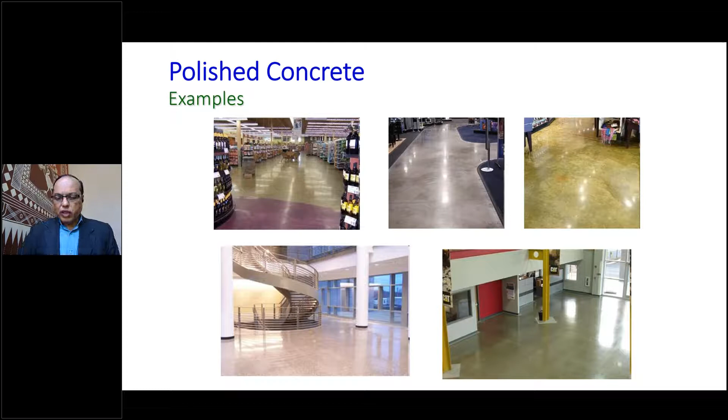Friends, at the end of my presentation, I take you to putting concrete in very inaccessible locations - locations you can't reach at all, where even reaching the site is difficult. I give you one example of concreting that happened quite some time back. Gammon India were the constructors, building a bridge on the Brahmaputra river at Jogighopa in Assam.

There was no road to carry concrete to the bridge site - the road was still being built. So the question was whether to construct the road first or the bridge first. A very innovative solution was done by Gammon India. I must thank Mr. S.A. Reddy, who used to tell me this story; he is no more today.

All these materials are filled, and then the barge moves in the river. It goes up to the site where the bridge is being constructed. There, you mix and make concrete, and from the barge you pump it out. That was a very innovative way the construction was carried out.

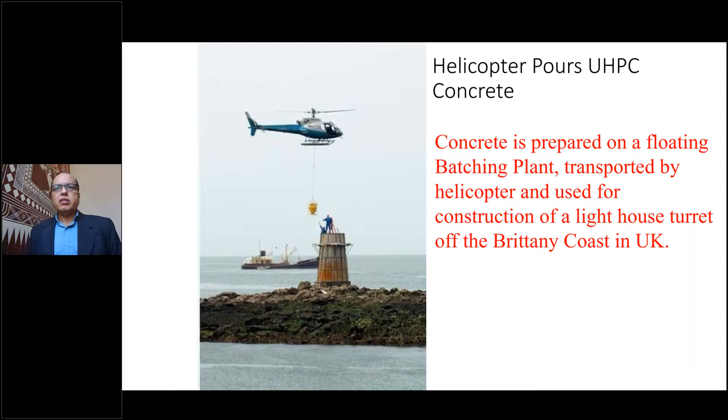Therefore, with this, I close my presentation. I have tried to take you all through a journey of concrete used for different purposes, right from housing to roads to infrastructure projects and so on. Therefore, friends,

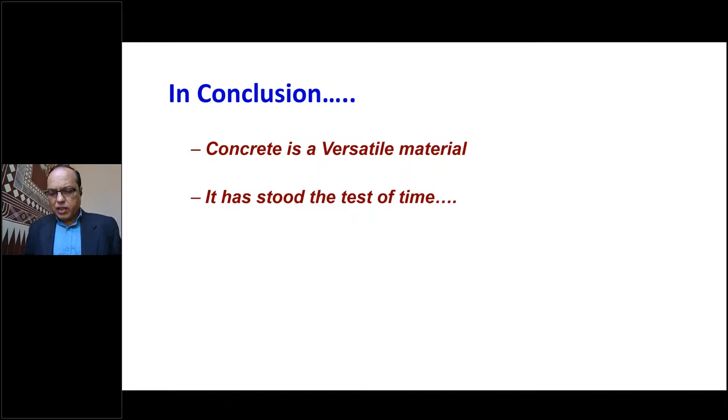in conclusion, I would like to say that concrete is a versatile material. I hope all of you would agree that concrete is definitely a versatile material, and it is a material that caters to all kinds of structures, all kinds of situations. And it has stood the test of time. That is the reason why there has been no alternative to concrete so far. That is a great advantage that we have. And I come back to my first statement that I made: it remains a democratic material.

Therefore, democracy succeeds, and therefore concrete also succeeds. But we should keep in mind that we should not test the tolerance of democracy. We should not go to the extent of challenging democracy or becoming intolerant or abusing democracy. In a very similar way, concrete also should not be abused, and its tolerance limits should not be crossed. That is all that I have to say today.

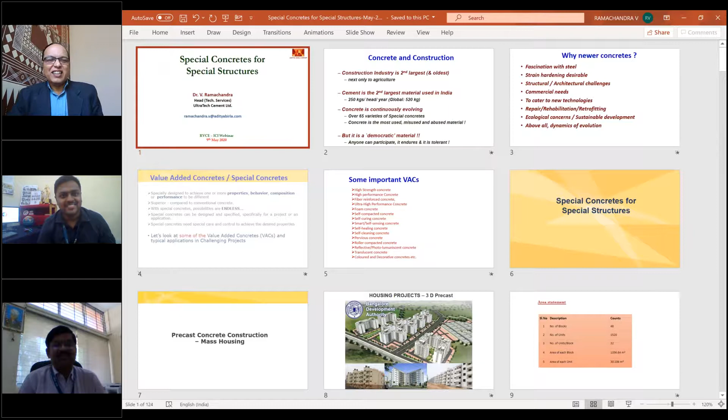I think it is a right question to a wrong person - it should have been to Professor Radhakrishna, who is there, but to my limited knowledge I will answer this; Professor Radhakrishna can add. Geopolymer concrete is definitely an excellent development which makes use of 100% supplementary cementitious materials. You can use 100% fly ash on one side, or 100% slag on the other side. Maybe ideally a mix of slag and fly ash will give much better performance.

Now, geopolymer concrete for practice has some more stages to cross, I would say. For the purpose of laboratory study it is excellent. For the purpose of a few small blocks that you can make, it is excellent. Even for precast units it would be useful because you can control the quality of concrete wherever you make it - then geopolymer concrete is likely to succeed.

I am afraid this will not be and should not be used in site mixed concrete. In site mixed concrete, you know our reality - we deal with semi-skilled, unskilled, literate and illiterate people who work on concrete. Mixing these things, adding the alkali activators, at what molarity we add, how do we control that, and so on - there are so many controls that have to be very strictly monitored. I am afraid if we start using it for site mixed concrete, we will be bringing a very bad name and early death to this particular concrete.